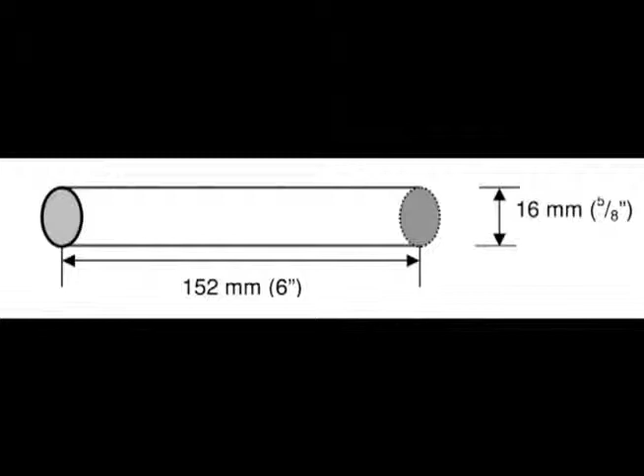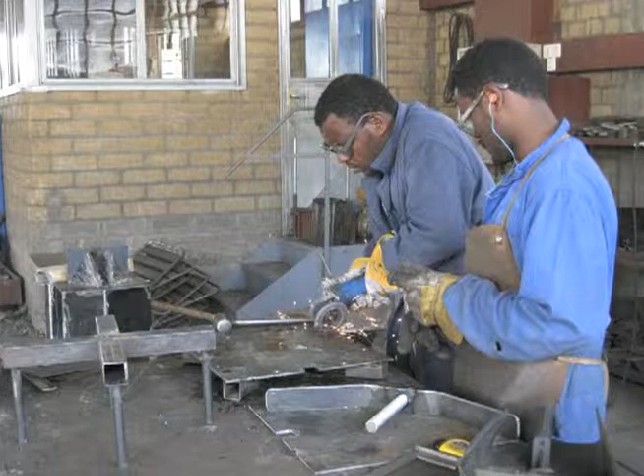Great! Now you're finished cutting the pieces. Next, you will be welding the pieces together. Make sure you are using appropriate tools and take steps to protect your eyes and your skin.

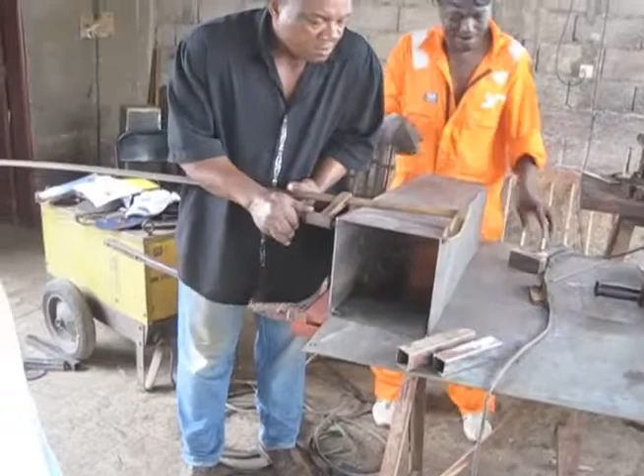First, you will weld the interior mold together. Start by lining up the top interior side pieces with the narrow ends pointed up. These pieces come from the 3 mm thick steel plate. There should be no gaps between the pieces.

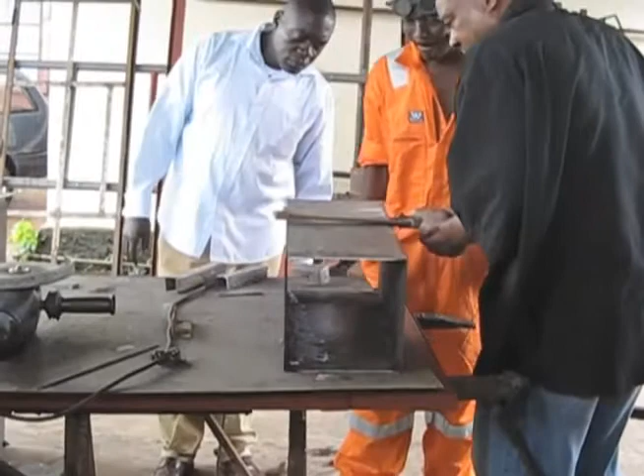You can use the bottom inside plate to make sure the pieces are square. Once the top interior side pieces are lined up, use temporary tack welds to keep them together.

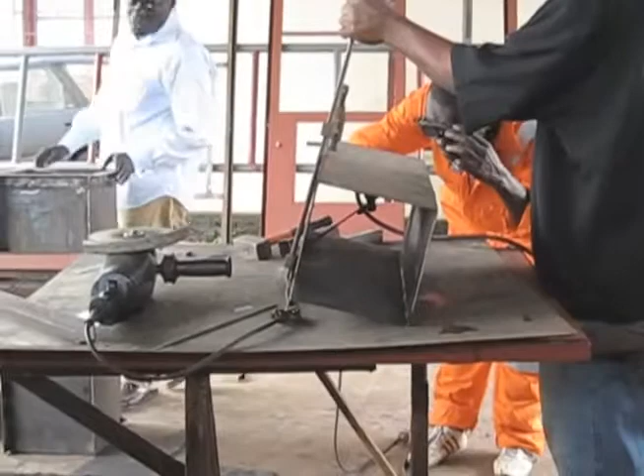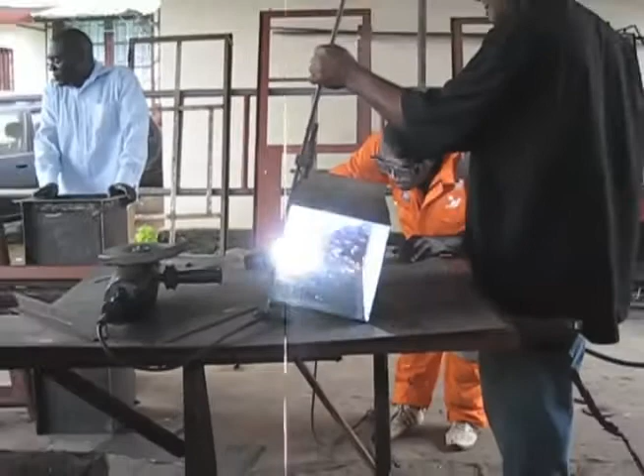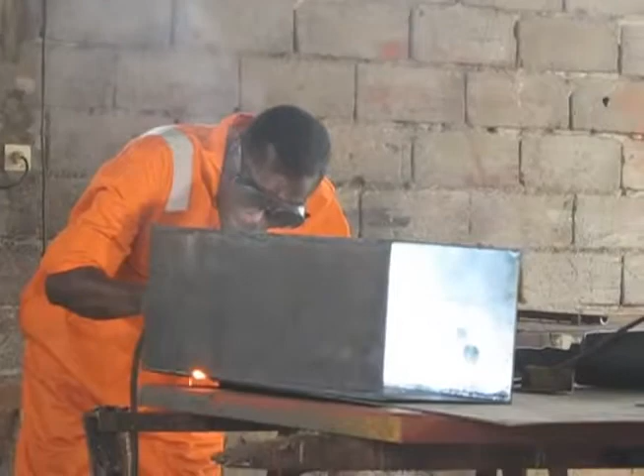Next, tack weld the bottom inside plate to the top interior side plates. Once all the pieces are together, you can finish the welds. Make sure to weld all the way from one end of the edge to the other end.

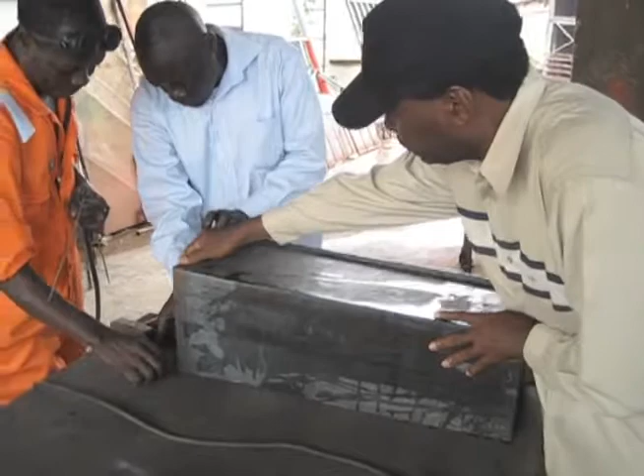Here's a tip. To make the process easier, you can weld 2 top interior side pieces together, followed by the other 2. Next, weld these 2 L-shaped pieces together.

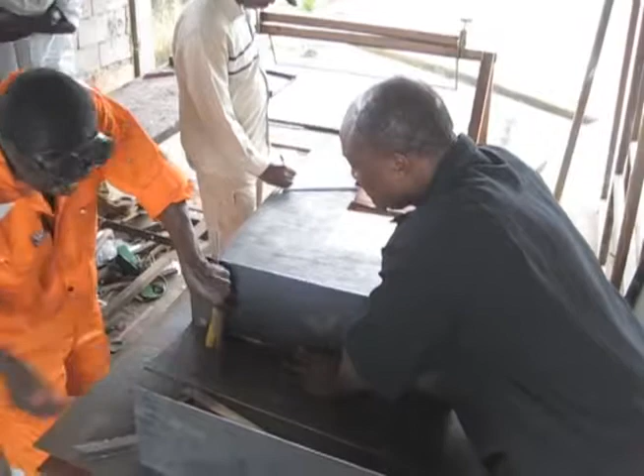Here's another tip. If you're having trouble keeping the interior mold box in a square shape, you can weld braces across each piece on the inside of the box. It may be useful to build jigs to keep the plate square while you are welding.

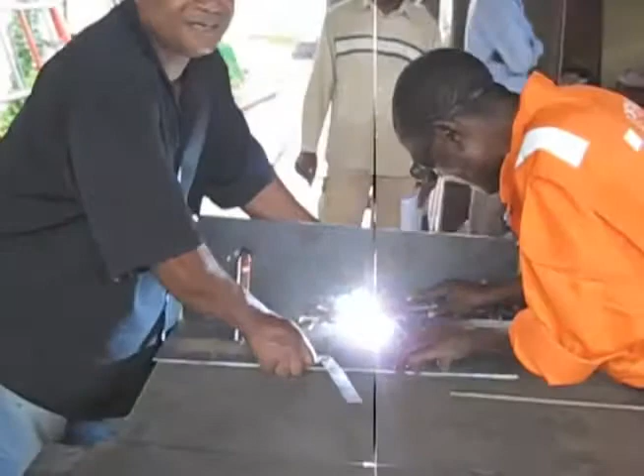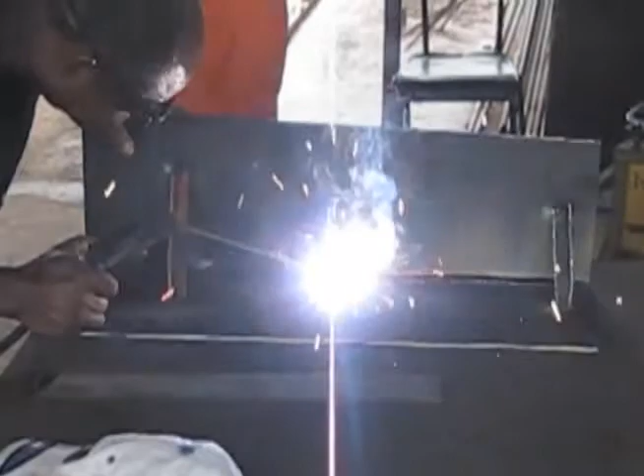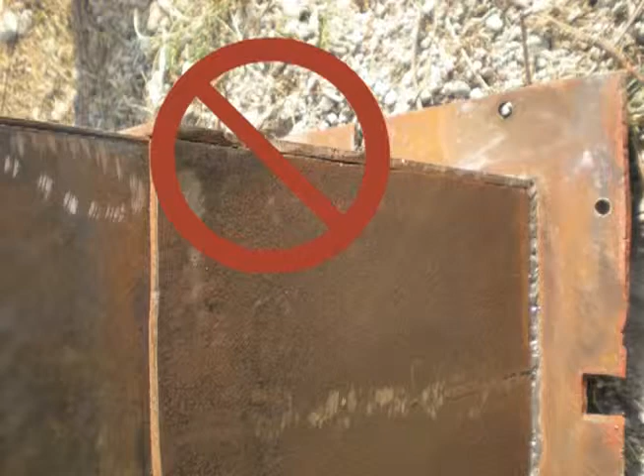Next, you will be welding the bottom interior side pieces together. Be careful, this step is the most important of the whole process. It is really important to make sure the pieces are lined up properly, or the concrete walls of the biosand filter will not be the same. This will make the filter much more likely to fail.

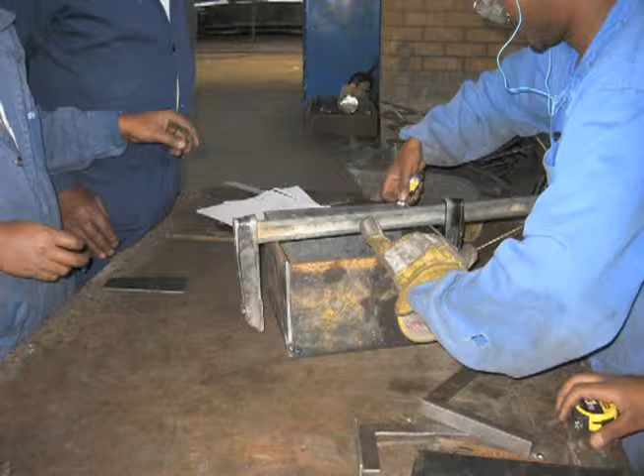Make sure you line up the bottom interior side pieces properly. Then tack them together. Check to make sure they are square, then weld them together. Once the bottom interior box is completed, weld it together with the top interior box.

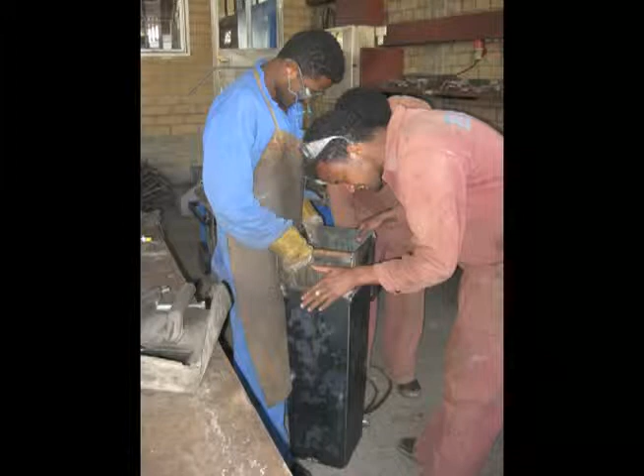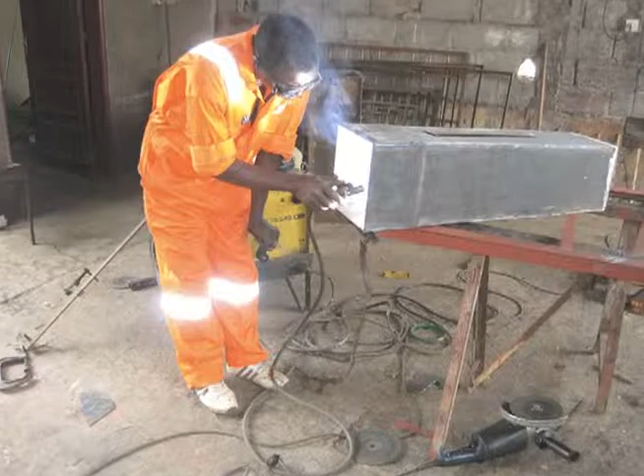First, slide the top interior box inside the bottom interior box. Next, tack weld the boxes together on the inside of the box. Finish the welds all the way around the inside.

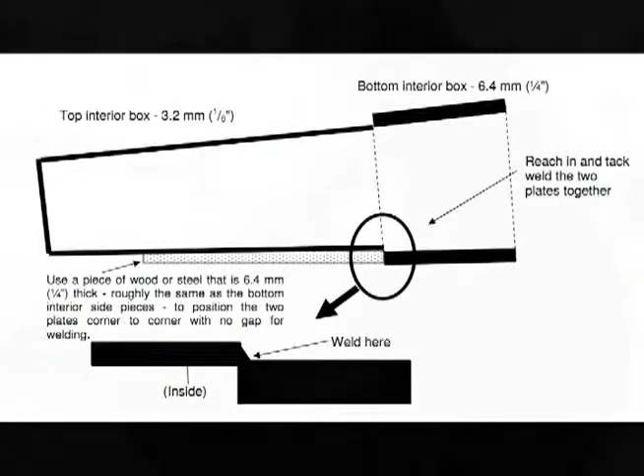Here's a tip. Make sure you do the welding on the inside of the box, since you will need a sharp edge on the outside of the box to make the ledge for the diffuser plate. Once the pieces are welded together, grind the edges until they are smooth. This will keep them from breaking the concrete when you remove the interior mold from the finished filter.

The instruction booklet tells you to weld 4 pieces of square tubing and 1 nut onto the interior mold base at this point. You can do this now or at the end. Emmanuel and Montoki decided to do this part at the end, so that's when we'll show it.

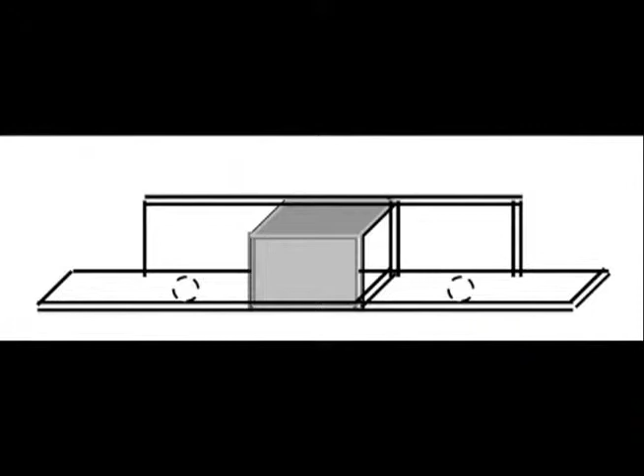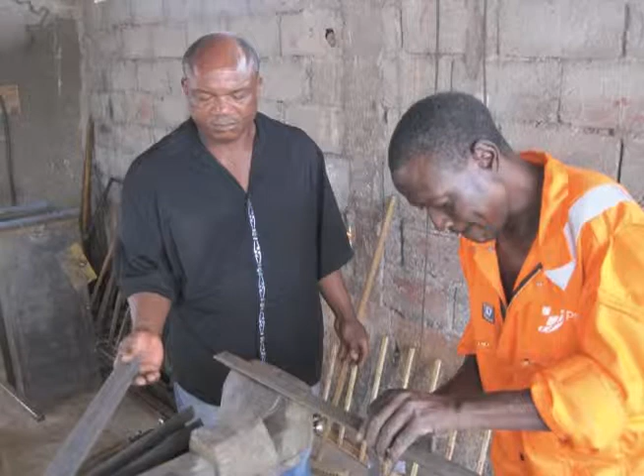Steps 10 and 11 are to put together the exterior mold. Take a piece of angle iron 305 mm long. Weld a 57 mm long piece of square tubing to the center of the angle iron. Weld angle iron onto 3 sides of the front exterior panel. Use the piece with the square tubing along the top of the front exterior panel.

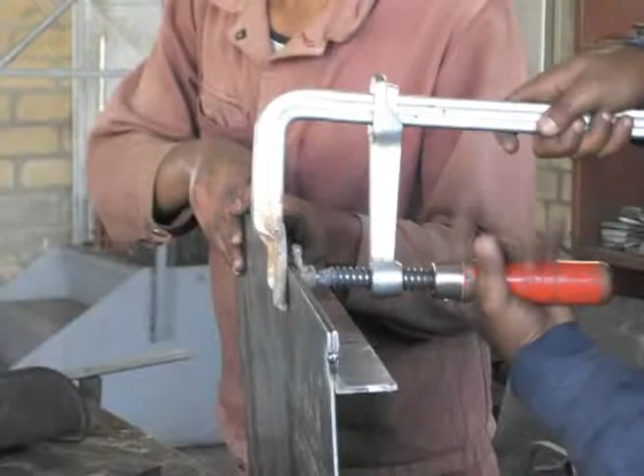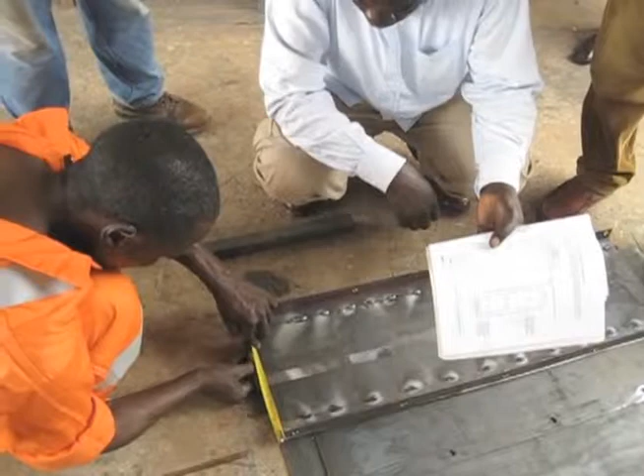Next, cut a hole for the nose in the front exterior panel. Be very careful to follow the guidelines in the biosand filter mold manual. Take your time to get this step right.

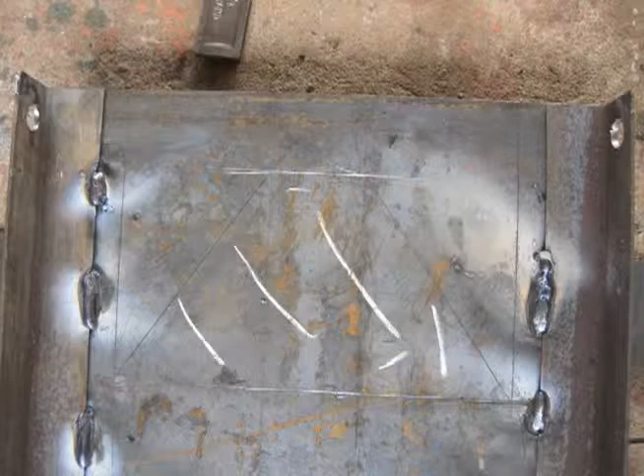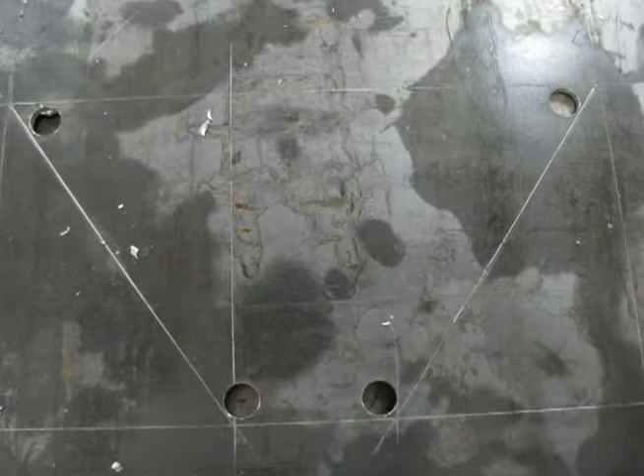Next, you need to weld the nose onto the front exterior panel. Emmanuel and Montoki are welding the nose from the outside, but it may be better to do this from the inside if you can. If you are welding from the inside, make sure you grind the weld smooth, otherwise you will have cracks in your filter.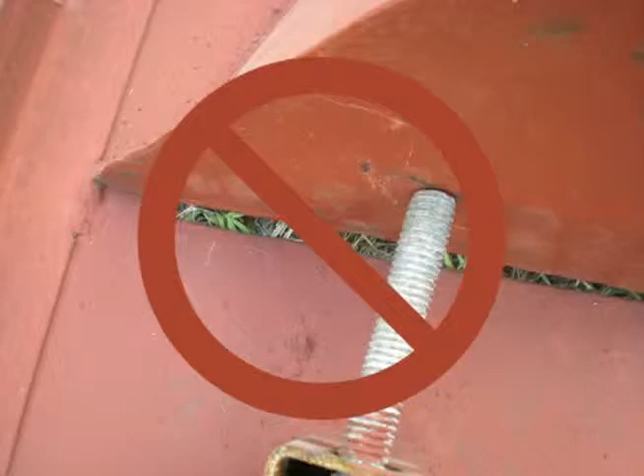Here's a tip. Notice that the nose pieces don't touch the front exterior panel at right angles. Make sure your nose piece looks like this one. Weld a 13 mm nut onto one of the remaining pieces of square tubing. This nut is for the bolt that will keep the nose piece in place. Weld the square tubing with the nut onto the front exterior panel.

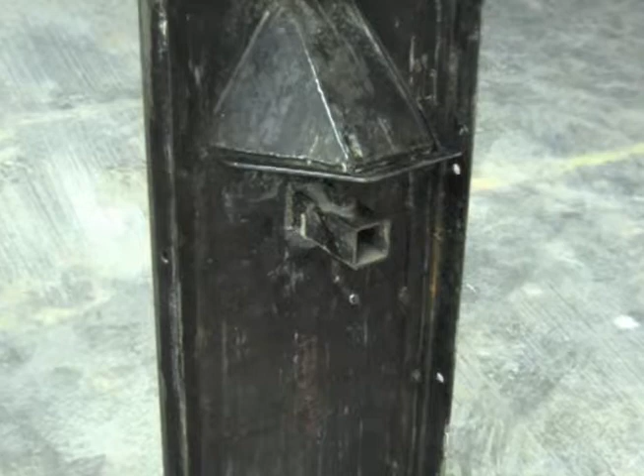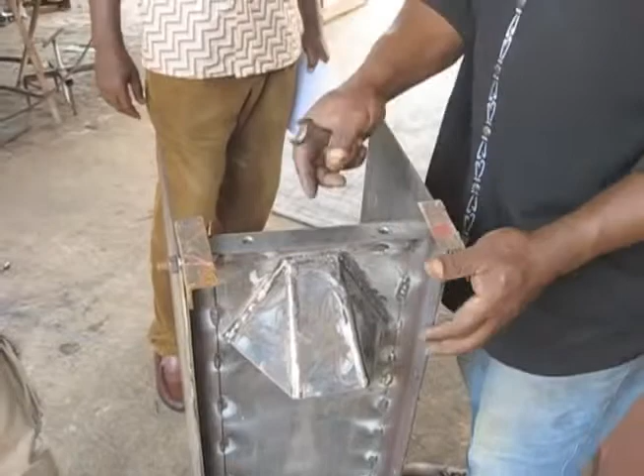Now that you are done the front exterior panel, let's move on to the back and sides. For the side panels, weld a 57 mm piece of square tubing onto a 387 mm piece of angle iron. Then weld this to the side panel, which is also 387 mm wide. This step must be done twice, once for the left side and once for the right side.

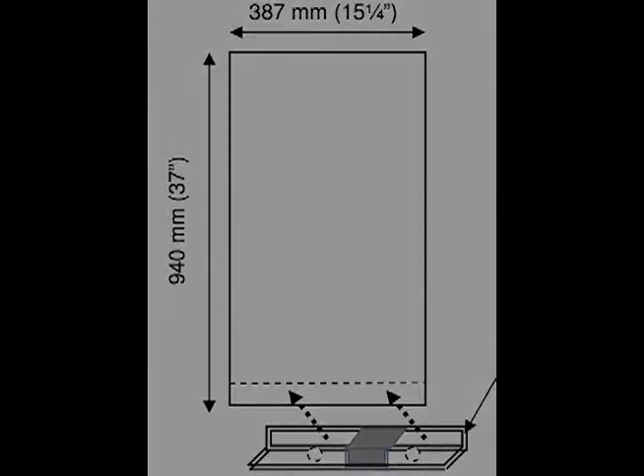Weld a 57 mm piece of square tubing onto a 305 mm piece of angle iron. Then weld it to the back panel. This is exactly the same as the front panel.

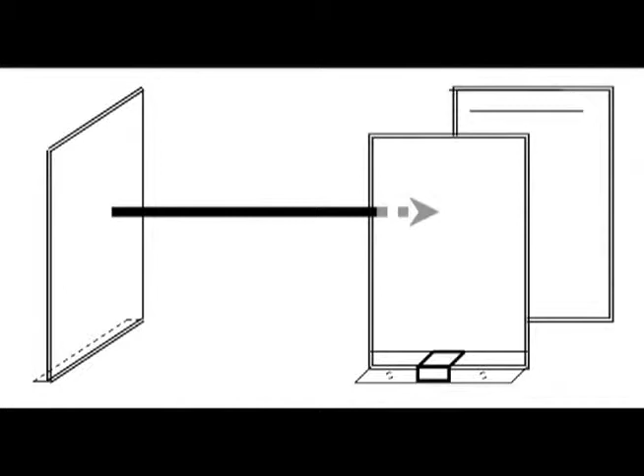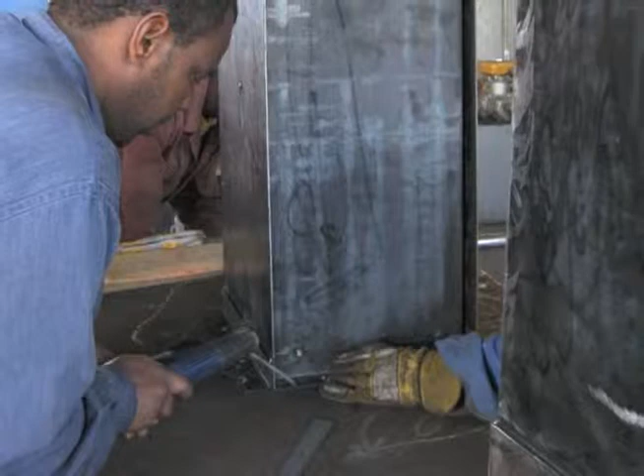Now you can stand the back and side panels together and weld them. Be very careful to make sure that the panels meet at right angles. Start by tack welding them, then make sure they are square. Once you're sure, you can stitch weld the pieces together.

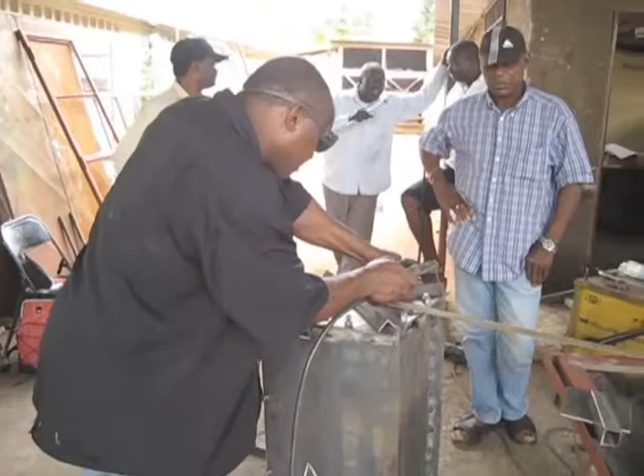We're almost done! We told you earlier that Emmanuel and Montoki decided to do step 9 at this point. You can do it this way too if you want. Here they are welding 4 pieces of 89mm angle bars and one 25mm nut onto the base plate.

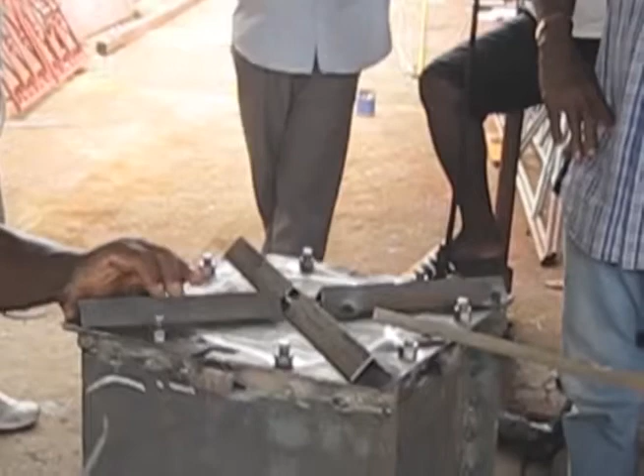Here's a tip. You can use square tubing instead of angle bars in this step. If you've used 3mm steel plate instead of 6mm steel plate for the base plate, you can make it stronger by adding longer square tubing or angle bars across the base.

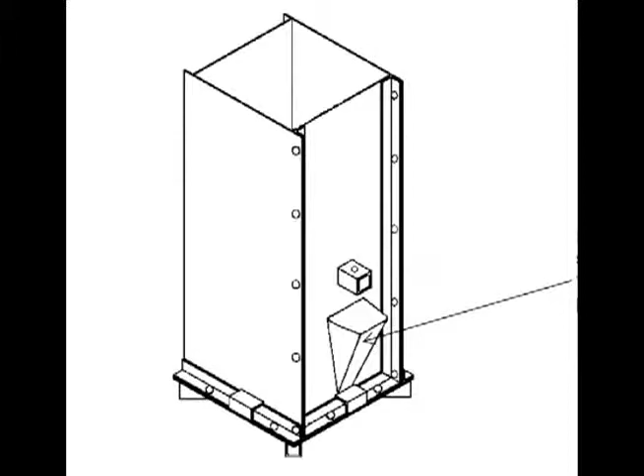Now you are ready to finish drilling holes in the exterior part of the mold. First, clamp the front exterior panel to the back and sides and clamp the base plate to the rest. Now, wherever there is a hole in the angle iron, drill a hole through the sheet metal as well. If you only marked the holes in step 4, now is the time to drill them all the way through.

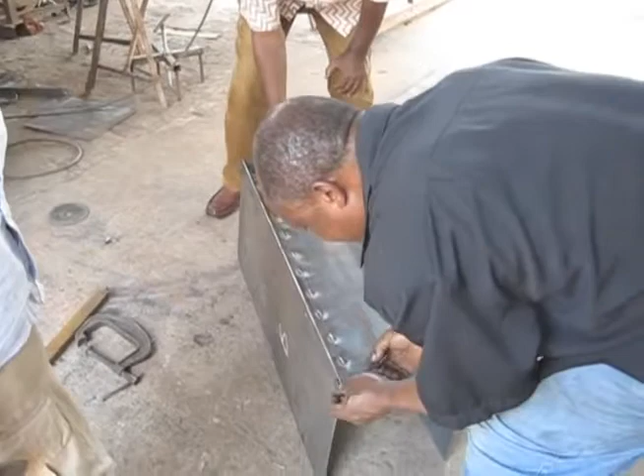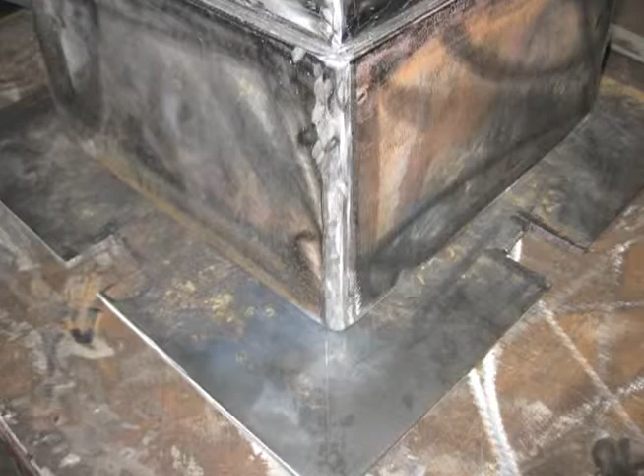The next step is to weld the interior mold base to the base plate. Start by bolting the back and sides of the exterior mold to the base plate. Next, put the interior mold inside the box.

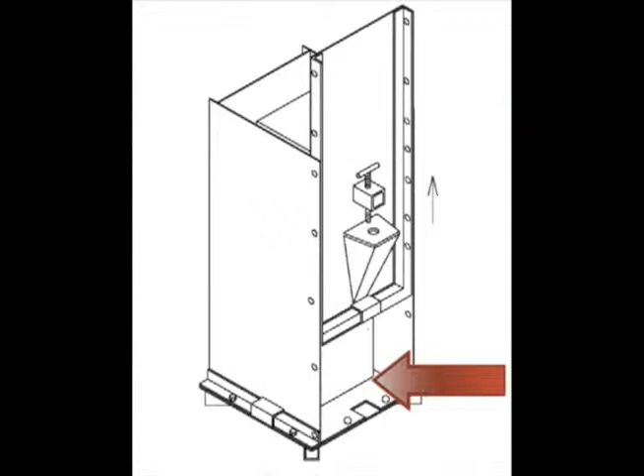After that, bolt the front exterior plate to the sides, but leave a hole so you can see the interior mold and base plate. Make sure you have the interior mold lined up, then tack weld the interior mold to the base plate. Now you can take off the exterior mold and finish welding the interior mold to the base plate.

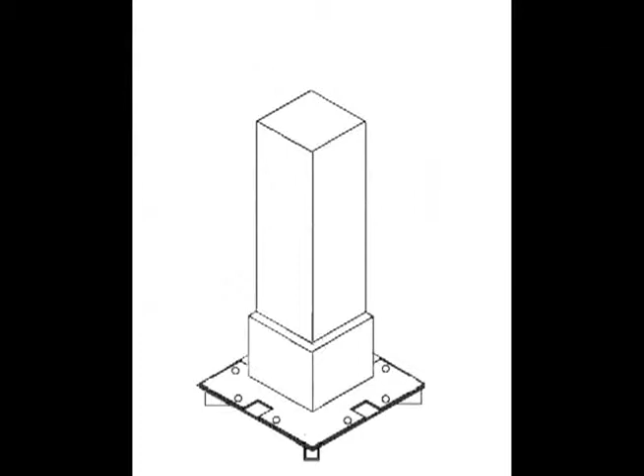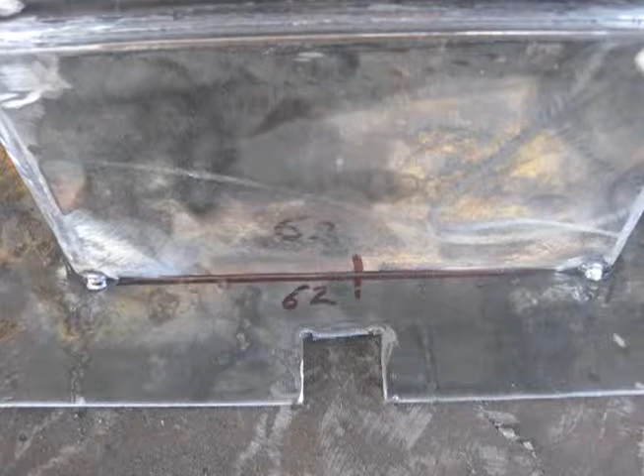Here's a tip. Make sure you put a little mark showing which side of the base plate is at the front. You don't want to put the interior mold in backwards. Once you have welded the interior mold to the base plate, sand the welds until they are smooth.

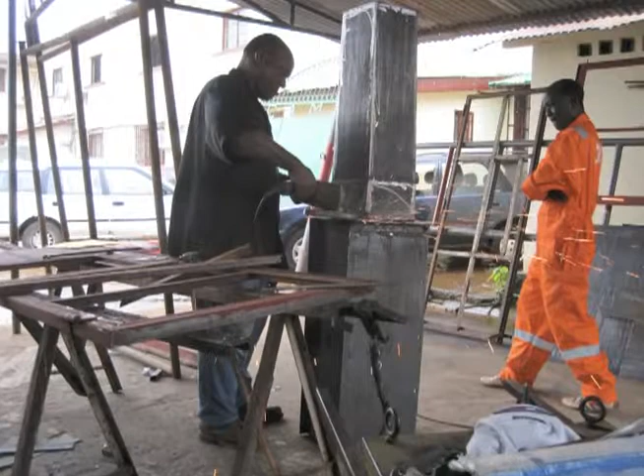Here's another tip. When you're sanding the welds, make sure you don't put a dent in the inner mold with the sander. If you do, then it will fill with wet concrete and will make it impossible to remove the inner mold from your finished biosand filter.

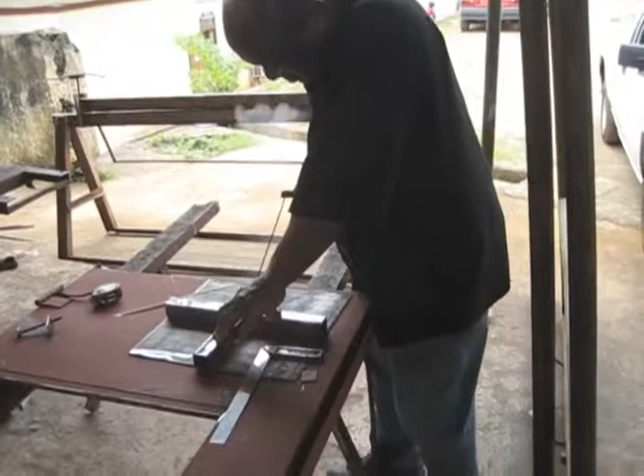Now you are ready to make the extractor. Weld 2 pieces of 175mm long square tubing to one 387mm piece of square tubing in a cross. Take the extractor support piece and weld it to the cross you just made. Make sure you line up the holes on the extractor support piece and the cross.

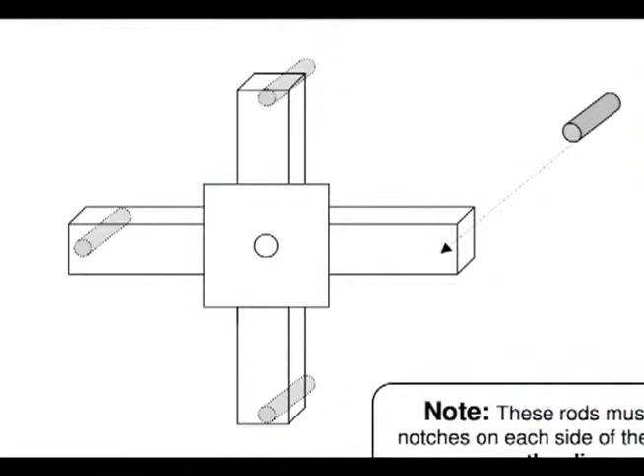Once you've done that, the next step is to weld the 4 152mm long smooth rods to the arms of the cross. Here's a tip. Make sure the smooth rods line up with the notches in the base plate before you try welding them. These rods help pry the interior mold out of your finished biosand filter.

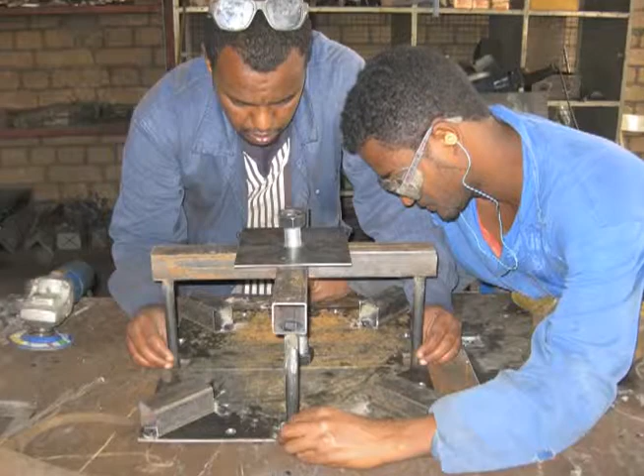Next, weld a piece of round rod to the end of the 25mm threaded rod. This is the bolt which will be used to remove the interior mold from the exterior mold once your concrete has dried. You should also weld a piece of round rod to the 13mm threaded rod, which is used to keep the nose cover in place.

That's it! We've reached the end! You have now built a biosand filter mold. Congratulations!

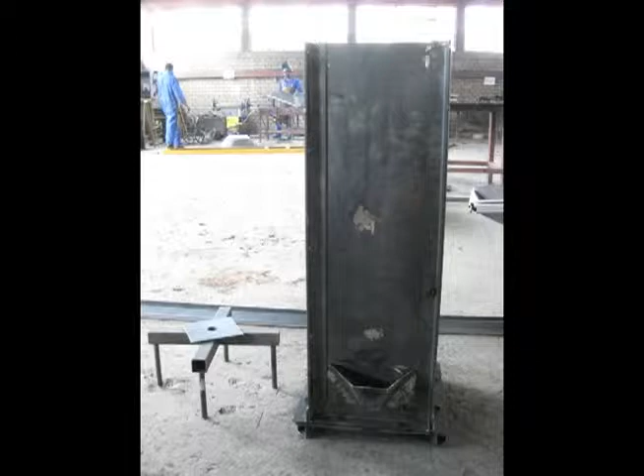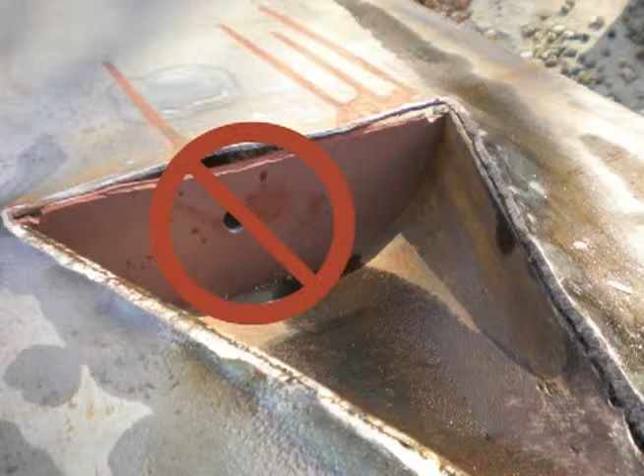Here are some final tips. Make sure to grind down any welds that are on the inside of the mold. If there are any sharp edges touching the concrete, it will make the concrete weaker and more likely to break. Don't paint the inside of the mold because it makes it hard to remove the finished biosand filter. Do paint the outside of the mold to protect it from rust. Use a rust-proof paint if you have some. It will make the mold last longer.

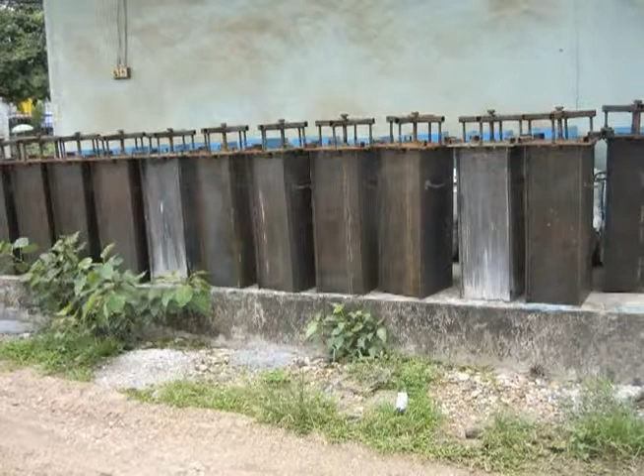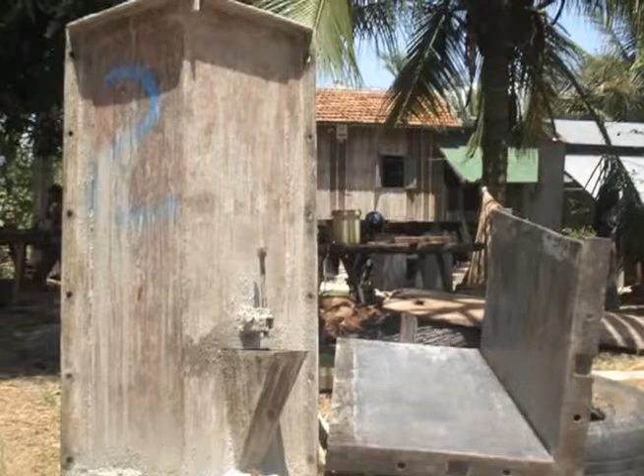Each mold you make will be unique as it is made by hand, so the pieces are not interchangeable between biosand filter molds. Make sure you label all the pieces so that you don't get any mixed up with the other molds you have made. If you can, oil the mold before storing it so that it doesn't rust. Make sure to use oil that you can eat. Also, store the mold indoors if you can.